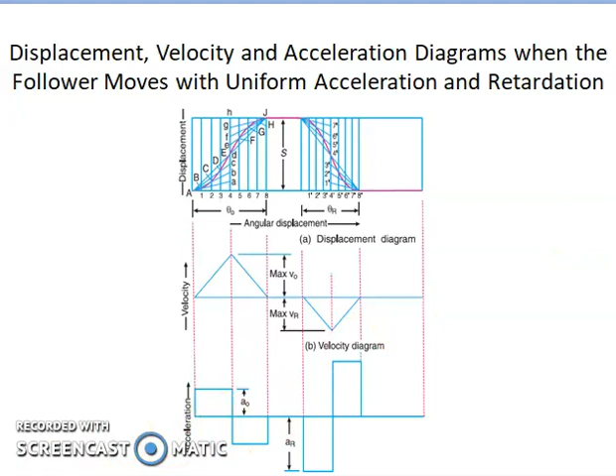So here in this diagram you can see the displacement diagram. How do we draw the displacement diagram? As already seen, for the displacement diagram we have theta along the x-axis and the stroke or lift of the follower along the y-axis.

As usual, we divide the outstroke into 8 equal parts. You can see we are dividing it into 8 equal parts. Now take the center line and divide it also into 8 equal parts: A, B, C, D, E, F, G, H. And again you can see 8 equal parts.

Now join the center point and the two corners. So join A to J, passing through E. The lower half points you join with corner A, and the points in the upper half you join with corner J. You can also name these points as 1, 2, 3, 4, 5, 6, 7, 8.

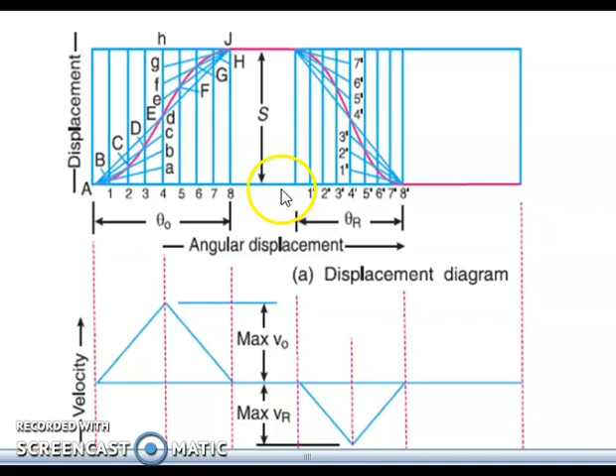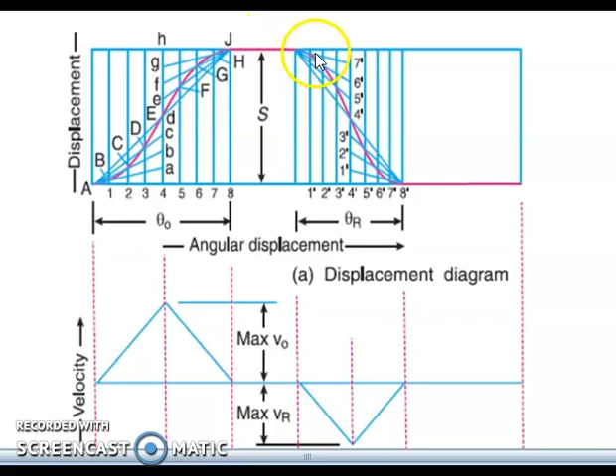8, 7, 6, 5, 4 - so that you can get the corresponding numbers. Once you've got the points, you join those using a smooth curve. So this is the displacement diagram.

So you can see the velocity diagram. In the velocity diagram, the maximum velocity is at the middle point, and when the displacement is maximum, velocity becomes 0.

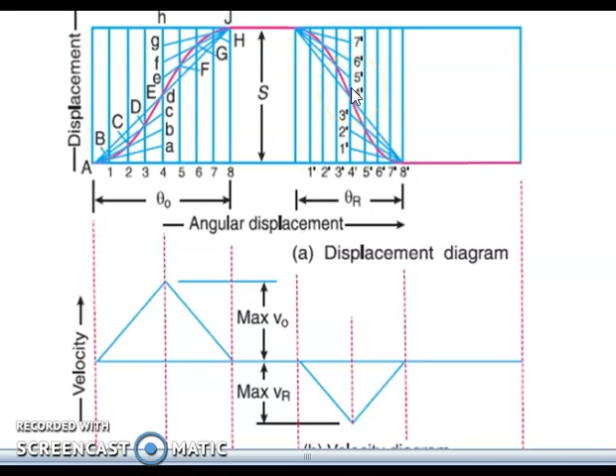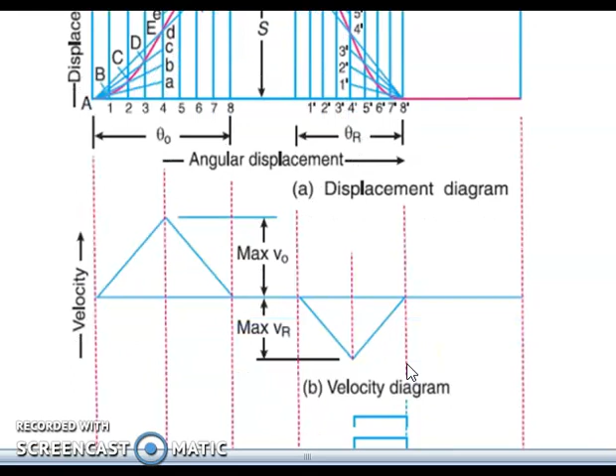Here you have no change in the displacement, so velocity is 0, and here velocity decreases, so the maximum velocity in the negative direction will again be at the middle, which is the average velocity, and then at the end, the velocity is 0.

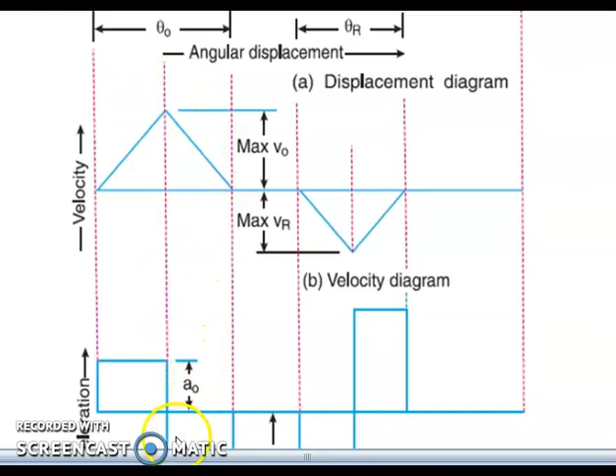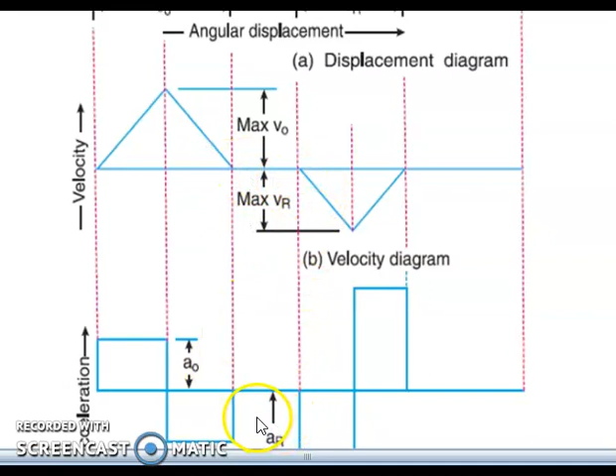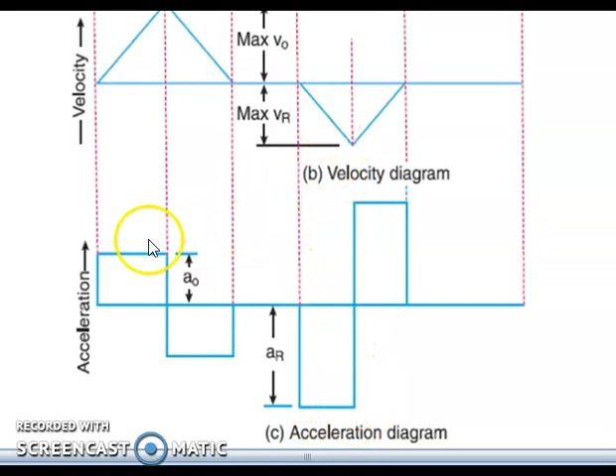Since this is uniform acceleration and retardation, you can see the acceleration is uniform. At the center it reaches 0, goes to the negative maximum, stays constant, then becomes 0. When velocity is 0, acceleration is 0. Along the negative side again you have the constant acceleration and then the positive acceleration.

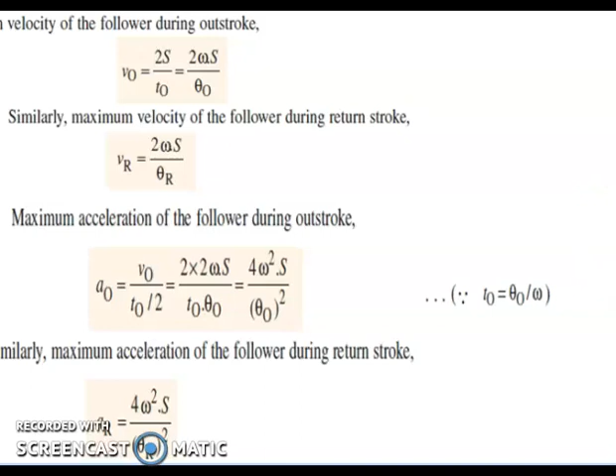Since this is the maximum velocity of the follower, the mean velocity is equal to minimum plus maximum divided by 2. So minimum is 0 and the maximum velocity is Vmax. So the maximum velocity is nothing but twice the mean velocity.

Therefore, the maximum velocity of the follower during outstroke, V0, is equal to displacement by time - displacement by time is the mean velocity. Since that equals 2 times the mean velocity, you have 2s by t naught.

We know that omega is equal to theta by t, so t can also be written as theta naught by omega. So V naught is equal to 2 omega s by theta naught.

Similarly, the maximum velocity of the follower during the return stroke, V return, is equal to 2 omega s by theta r.

Next, we will find out the maximum acceleration of the follower during outstroke. We know that acceleration is equal to two times the mean acceleration.

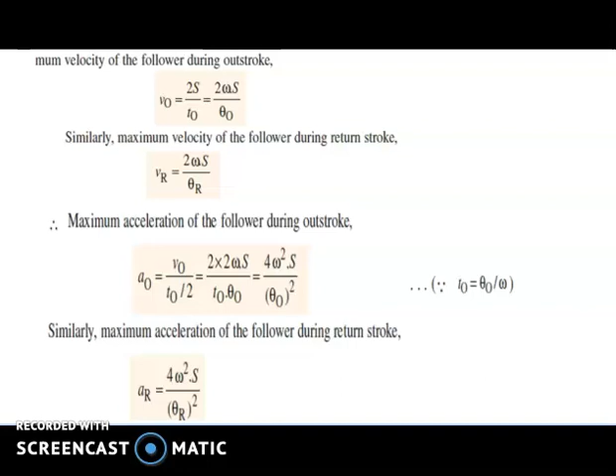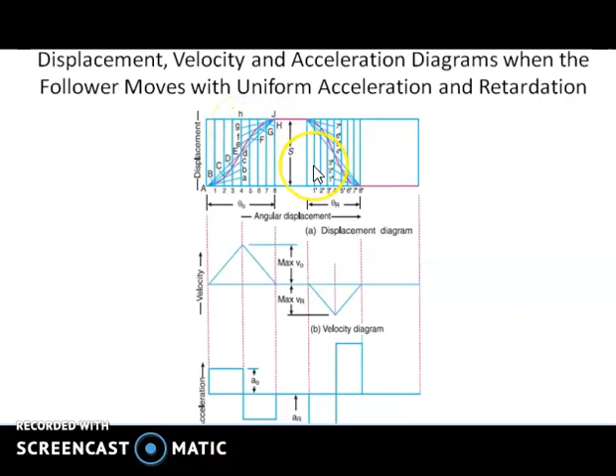To summarize, when the follower moves with uniform acceleration and retardation, the velocity is maximum at the mid displacement. Similarly, during the return stroke, velocity is maximum at the mid displacement. When the displacement is maximum, velocity is 0.

Since it moves with uniform acceleration, it reaches the velocity, maintains the same acceleration, then dips to the negative, maintains the same acceleration, and reaches 0.

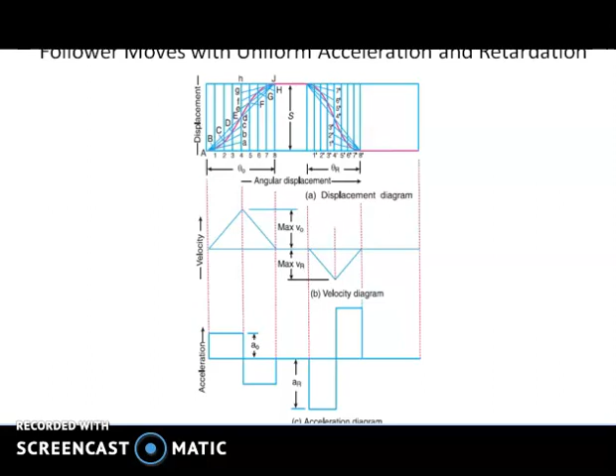Then we derive the expression for maximum velocity of the follower during outstroke and return stroke, and maximum acceleration of the follower during outstroke and return stroke.

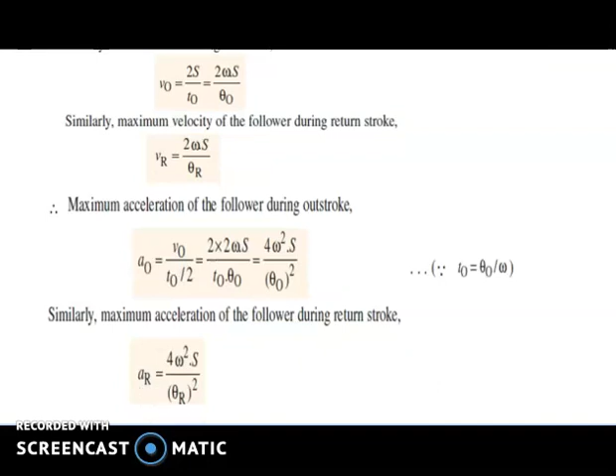So the next part - the remaining 3 types of follower motion - we will discuss in the next class.